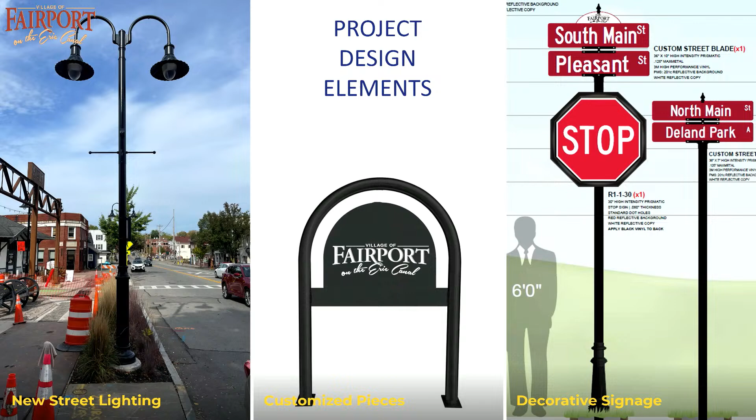Do I have to hold that, or just get, okay. Everybody can hear me, I think, yeah, okay, thanks. I'm on a borrowed laptop here, so bear with me. I'm a landscape architect, and my focus is the streetscape elements, things like pavements and trees and tree grates and ornamental pavements and furnishings and amenities. All these things contribute to the site aesthetic, and if we do that right, it'll really be a memorable corridor, an interesting and memorable corridor. So we're going to hit on a lot of these elements very briefly.

Just to start out, I see, okay, this is a different program. So there are actually 5 different zoning districts within our corridor. The top bar there shows the southern half of our project limits, and the bottom screenshot is the northern half of our project area. Within our project area, there's portions of a business district, landing development district, canal district, industrial district, and a residential district. For our purposes, we were thinking that we'd create sort of a typology for the residential zone and for the business zone.

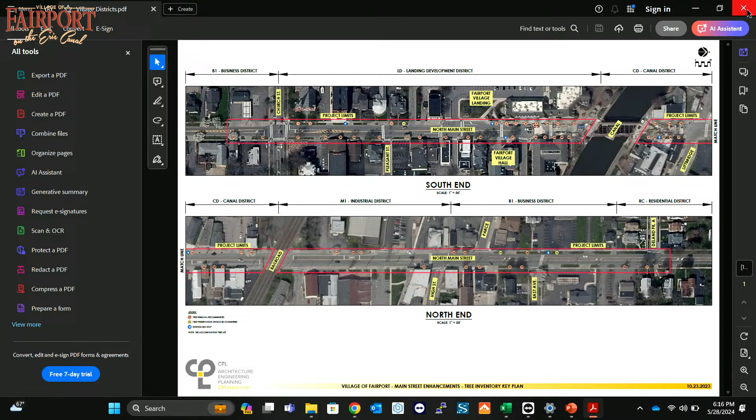Starting out with pavements, what you have now are mostly brushed concrete. You can see there's no, what we've been calling a buffer strip between the main walking corridor and the curb. That's just all one area of pavement interrupted by 4x4 tree pits. There's very little of anything else other than concrete.

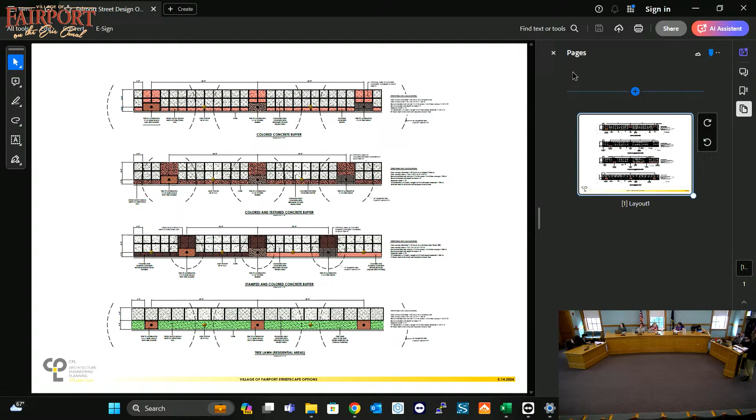So in this picture, here we have four different conceptual plan views of a typical sidewalk.

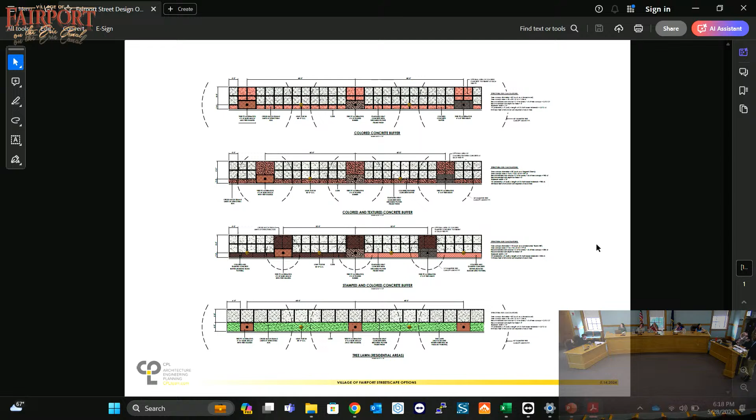The top one shows 50-foot trees spaced 50 feet apart, like honey locusts. The middle one shows the spacing of smaller trees, and the third one down is very small trees such as serviceberry.

The point is that the street lighting spacing and the tree spacing are sort of integral, and they're typically on the same spacing. So if we have trees 50 feet apart, we'd probably have street lights 50 feet apart, so the lanterns don't conflict with the canopies.

We're also showing here, though it's tough to see at this distance, a buffer strip—a 2-foot buffer strip between the curb and sidewalk—and there are lots of options for that. We were thinking possibly a textured concrete with maybe a color agent added as a release agent to impart a little bit of color, distinguishing it from the brushed concrete. There are other options too, like stamped concrete, and of course cobbles or unit pavers.

There are a lot of different things that can be done, but one thing that's rising to the top is this textured concrete with color added via the release agent, because it can be done readily by in-house forces, and it's easy to duplicate the color.

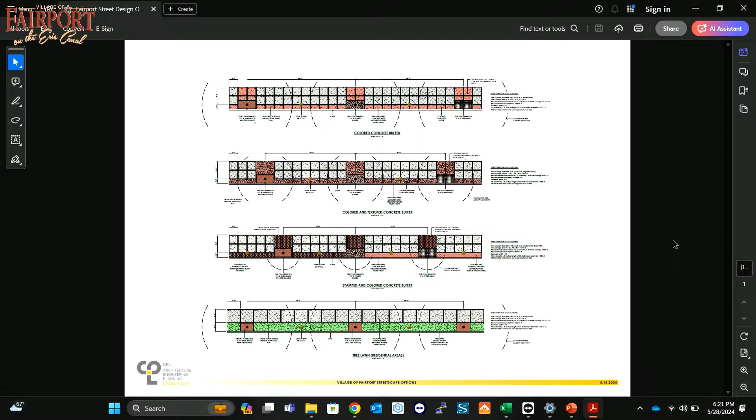So let me go back here. All right, we talked about the pavement buffer strip, curbing.

Detectable warning strips are another element. These are required by law to be placed at the bottom of every curb ramp. They feature little dimples that alert people that they're about to enter a vehicular zone.

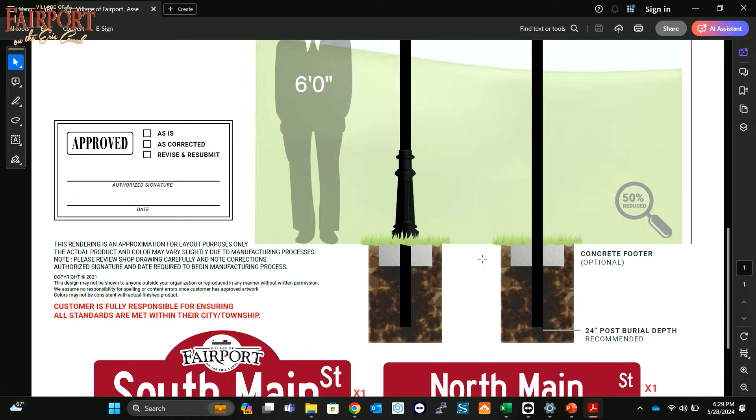Like what's shown on the stop sign, a frame around the sign is something that makes things look more modern and is completely within regulations for allowable installations—just a little thing that helps it stand out. Within the downtown business district, we can make sure we get larger, more substantial signposts that give it more presence with decorative treatments at the base. There are lots of different ways these can be customized, including decorative bases, and the poles can be fluted—lots of fun things you can do with the signs.

Moving on to tree pits. The trees and tree pits are causing a lot of damage to pavement throughout the corridor. I'll run through a few examples. Because there's no structural soil, the roots experience resistance. Roots always take the path of least resistance when they grow, so if they can't find anywhere to grow, they often end up pushing up pavement and curbing, which is what's happening here. There's example after example.

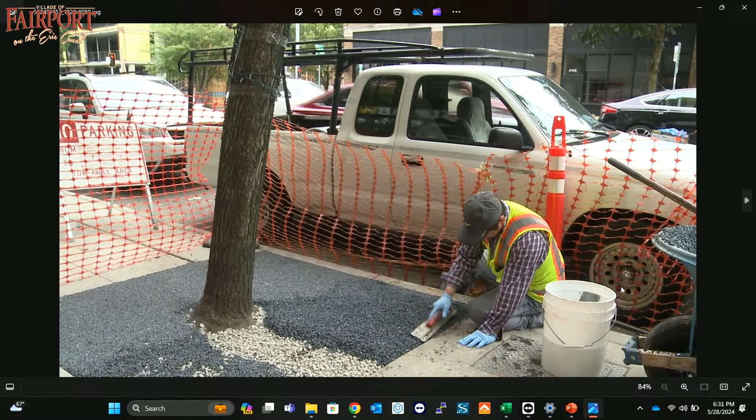A couple of pictures here with the poured rubber being installed, and it's also forgiving. So you can basically pour it right up to the tree trunk, and as the tree grows, the rubber allows it to do so.

Oftentimes with tree grates, concentric rings are supposed to be removed over time to make more room for the tree, and what often happens is they forget to remove the rings, and the tree grows into the tree grate. So this is a recommendation - this is a good product. I think you should consider using this for your tree pits.

The other obvious option is tree grates. They come in a lot of different sizes. What we're recommending is 4x6 tree pits for the health of the tree, and tree grates come in 4x6. A lot of different designs - they can be iron or composite, and they look nice, sort of a traditional look.

But they have a few problems. I think in some places they're being stolen for the metal to be scrapped, and often garbage and stuff can get underneath the grate and it becomes difficult to remove, so it can become unsightly. And they require a little maintenance to make sure they're wide enough to accommodate the tree trunk. But that's certainly another good option.

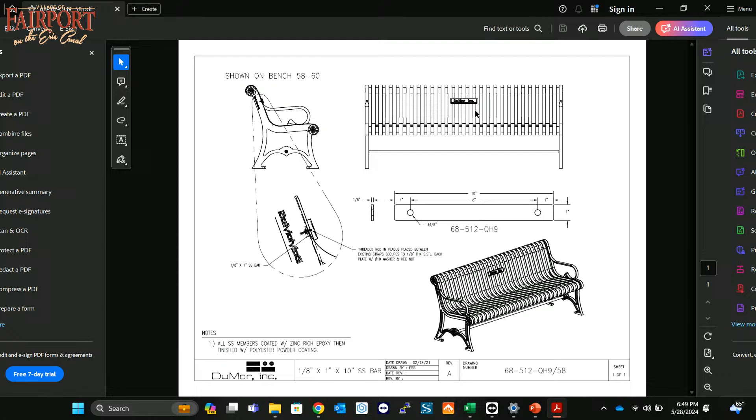We talked to DuMor, and the DuMor 58 bench can be easily retrofitted with a little plaque. So the existing benches you have, if you wanted to introduce some sort of program of interpretive elements, you could simply attach little plaques with a barcode to your existing benches. This is something they've done on their wood benches - this is a stainless steel plaque, and it could highlight moments in the history of Fairport, or important figures in Fairport.

We thought some opportunities - not just the benches - repeating elements along the corridor are opportunities for some sort of program, such as light poles or pavers. We could engrave pavers. We thought this would be a logical place where coordination with a village historian would make a lot of sense, to try to seize on some interesting things from Fairport's history, and also perhaps the poetry program, and capitalize on Tree City USA. That's really one of the fun elements of this project that we've been playing around with on the design team.

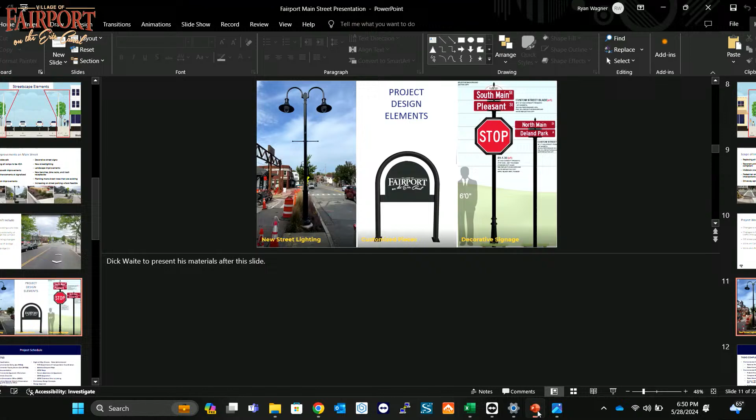This is a statement project for the Village of Fairport, and it's really going to be transformative. Rather than just have it be any ordinary transportation project, we're looking for opportunities to make this an amenity for the community - interactive elements like Dick was talking about, information on the trees where they can link back to a website. As we're reaching out to the public through public outreach processes, we're going to be soliciting feedback, opinions, and potentially even ideas, which is a good segue into the next section on our project schedule.

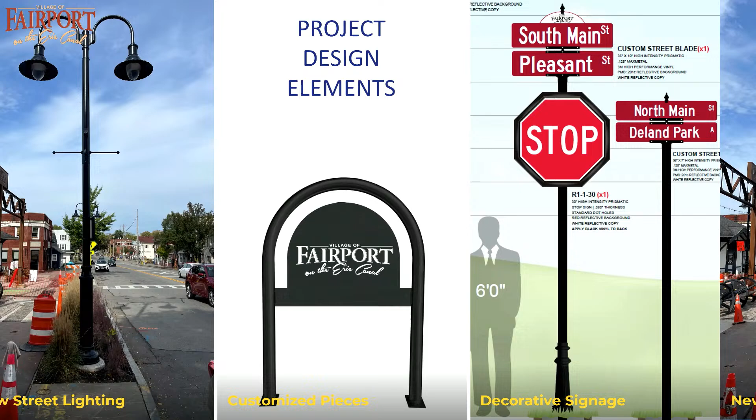So, tasks that have been completed to date - we've been working on this project for about a year now. It might not seem like a lot has been done, but this lists a chunk of the work we've had to get through. With this being a federally funded project administered by New York State Department of Transportation, there's a lot of regulations we have to follow. Right off the get-go, we had to start working our way through the environmental impacts.

So, the environmental classifications, environmental documentation - we had to put together our research on the historic properties in the corridor, and send our reports into the State Historic Preservation Office to determine if this project is expected to have an impact on historic properties. With this project being limited to the curb line to the highway boundary, it was found to have no adverse effects, which cleared us to keep moving forward with the project.

We had to look at the endangered species, get approvals for the complete streets and the federal environmental approvals worksheet. We looked at the crash data - we had to do the analysis for that to satisfy the NYSDOT requirements, NYSDOT being New York State DOT.

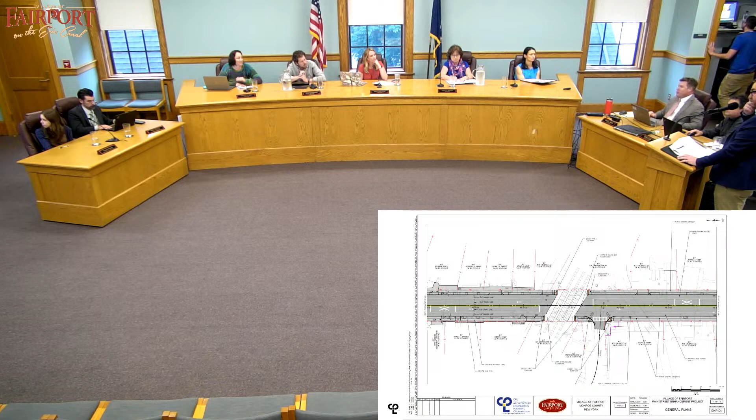Oh yeah, yeah, I'm describing it, but I did have it. Yeah, so this is...

This is the design that we put forward to the Department of Transportation with no objections from them. So this is what I would consider an acceptable solution.

It's a little awkward because you have to ask the cyclist to basically come to a stop and transition down. If this is the treatment we end up installing, if we can't come up with a better solution, there are going to be cyclists that just travel on a diagonal across the intersection—and maybe that is the right treatment rather than trying to fight the cyclists. Let's work with them and put the bike lane where it's supposed to be.

These are designs we're going to be exploring further. But as I was saying, the intersection is really a challenge with traffic—when the lift bridge is up and traffic comes to a stop, the preference is for vehicles to not block the intersection. So what treatments can we install to encourage traffic to stop short of the intersection, so we don't block it for pedestrians and cyclists who should be able to continue using it safely. As we advance further, we'll keep exploring and try to put forward designs that work for the village.

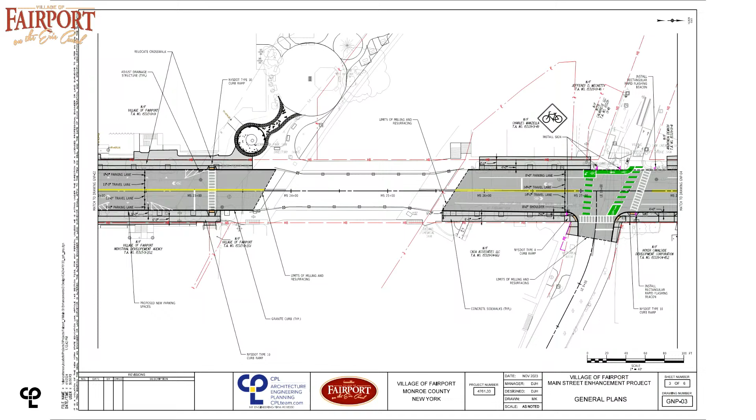Right, and cyclists are the exact kind of people we want to get feedback from on these treatments. I'm a cyclist myself, and I think about when I'm riding the canal and encounter a situation like this, what would I want to be doing? I certainly don't want to be weaving through traffic if I can help it. But it's a multifaceted problem—trying to get cyclists lined up with the two sides of Lift Bridge Lane, and then the inevitable traffic backup when the lift bridge is up.

Okay, I'm almost done with questions. I love them.

I'm assuming the type of trees you recommend is in that long 60-page tree document, in terms of native trees and sizes and all that stuff—that's all in there? Yes. Not specific recommendations for our situation yet, just options. That list is marked up, I didn't know whether they're native or exotic. But I would advocate for a palette of primarily native trees.

With regard to the rubber and the grading around the trees, does the rubber or any water running through that pose any kind of risk to groundwater? No, no.

For the lighting, the gooseneck lighting - I don't know if Ryan can answer this - will that help with sky darkening and light pollution? The gooseneck with the round? Yes, there's no uplighting from those at the top.

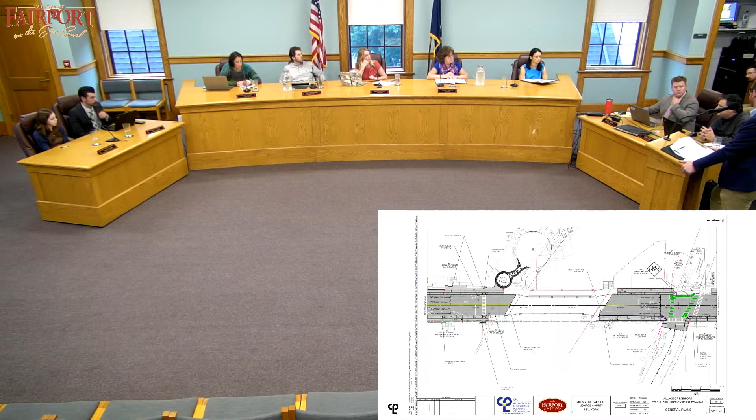Back to the trees, what is our current spacing? Because you were talking about 50 feet apart when you were showing those four examples. What is our tree spacing now? You know, I haven't studied that. It really feels like it's sort of haphazard. I didn't really observe a whole lot of regularity with regard to tree spacing and light post spacing. So the answer is it varies. There's no consistency that I observed.

But we'll be putting back more trees than we're taking out. Yes, there's a lot of tree pits where the tree died and they're empty, and sections with a lot of concrete that we can clear up and turn into green space. So it was pretty obvious to us there's a lot of opportunity to plant more trees than exist now. The size of the trees might even be planted closer than would really be advisable, which might be leading to the problems Dick had identified with the health of trees, how the roots are growing, and the limbs growing into each other.

So we want to take a really educated approach to the trees that get installed on the project and their spacing, also taking into account all the new lighting we're going to be installing, designing for the corridor. So really it winds up being a whole cohesive picture. We have to look at a lot of elements. Thank you.

More about the trees. Sorry.

So you had shown different models with 50 feet apart, and there were four different versions. With the widest spacing, you can obviously plant the largest tree, which gives us the greatest amount of shade and the largest canopy. Is that correct, or am I just assuming that? No, I think that's a good assumption. But trees, depending on the species, have different growing habits. Some are more columnar and some are more spreading. But as a general rule of thumb, the bigger the tree, the bigger the canopy.